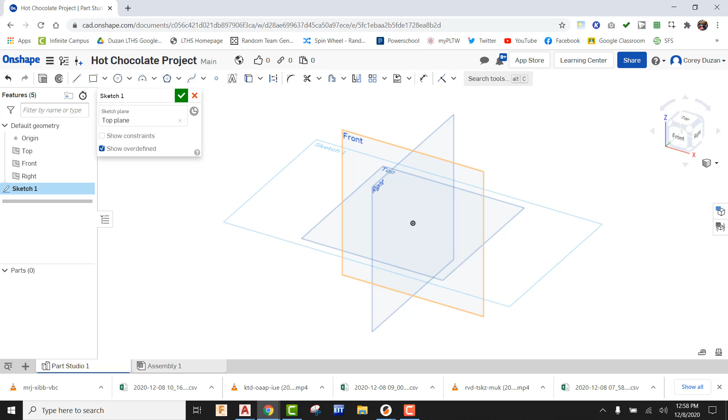Let's go ahead and create a new document, and I'm just going to be calling that one Hot Chocolate Project. I'm going to go ahead and create that public document. Once this gets up and running, let's begin by starting a sketch on our top plane. Let's look at that top plane on the view cube, and draw a circle starting from the origin, and we're going to give that a diameter of 4 inches. Let's go ahead and green check it.

Take a look at this in an isometric view, and now let's extrude that mug up a distance of 4 inches. That's probably about the size of a mug. So now we need to put the cavity in which the hot chocolate's actually going to be. We could draw a circle and extrude that, but let's just keep this simple and use some of those features we've already learned about this year.

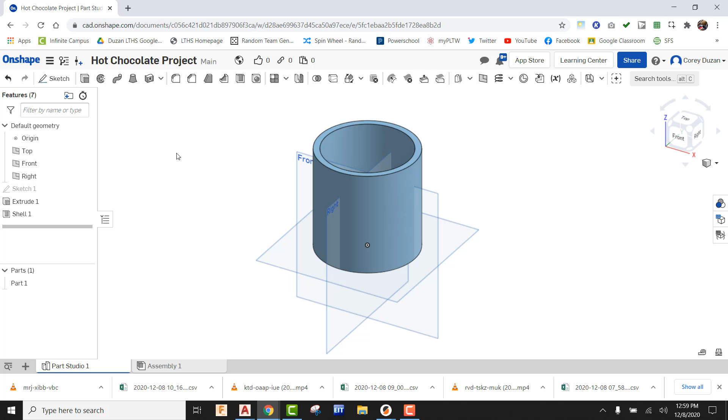That feature I'm looking for is going to be shell. I'm picking on the top face to remove it, and I'm going to say that the thickness of the wall on my mug is going to be 1/4 of an inch. I'll green check that. Now, it seems like those are pretty sharp corners for a mug. If you take a look at the ceramic on a mug, you can see it's rounded over just a little bit.

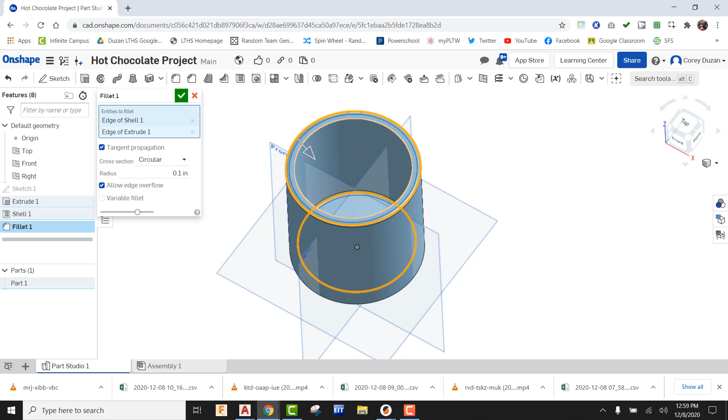So let's go to fillet, and let's just go with 0.1 for our fillet radius. Let's grab that inside corner, this top edge, and then flipping it over, we'll also grab that bottom edge as well. Green check it, and now we can see that everything is rounded over, just like a coffee mug. It's not going to be a mug without a handle.

So what I'm going to do on this one is offset a work plane, and the work plane I'm going to start from is this right plane right here. So I'm going to do an offset and pick on that right side plane. Let's see if I can grab that. There it is, I'm grabbing that plane.

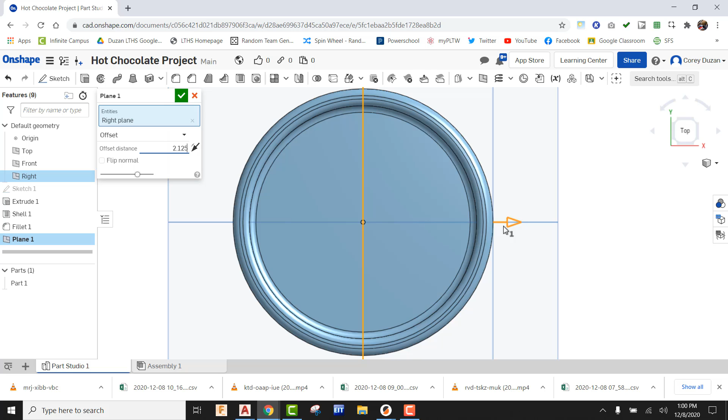We know that the diameter of the mug was 4 inches. So if I bring this out to 2 inches, we should see this come right to the edge. But I want to give my handle a place to start, so I'm going to bring this out to 2.125. I'll green check it, and now we can see that plane is just off the mug itself. So I'm going to start a 2D sketch on our plane. Take a look at this right side plane.

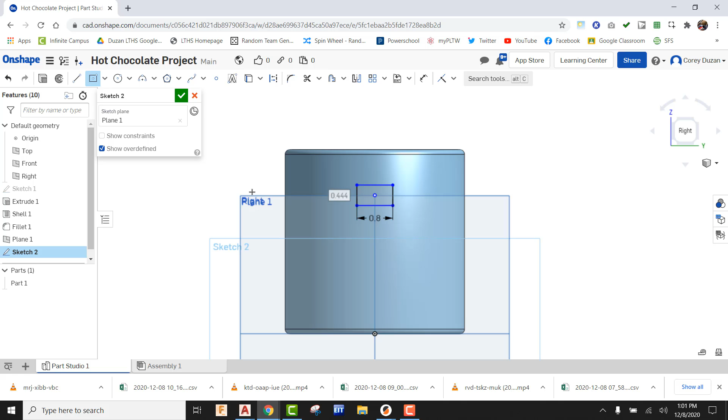I'm going to come up here and find our center point rectangle. I'm going to track this off the center and construct this rectangle. The overall width on this, let's just call it 0.8, and hit enter. The thickness on this, let's see what 0.25 looks like. That looks pretty good. Now I'm going to dimension this top to top edge; that looks about right, about 1/2 of an inch.

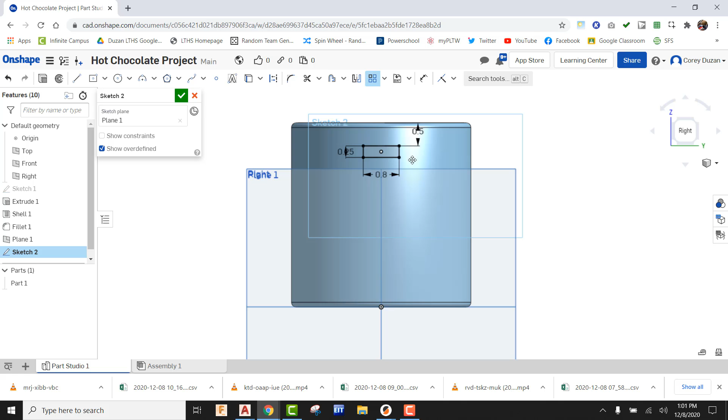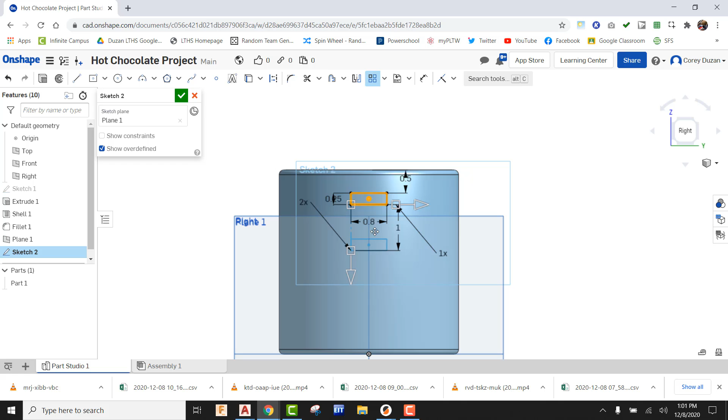I'm going to do the same thing down below, but with a linear pattern. I'm going to grab all this geometry. I don't want there to be 3 of those; I just want there to be 1. Then over here I want there to be 2 of these. Then I'm going to flip the direction and put in 3 inches. Let's see how far down it goes. Looks pretty good for mug handle placement.

Now what I'm going to do is round over the handle just a little bit. Coming up here, I'm going to find my fillet and add a fillet radius of, let's just call this 0.1.

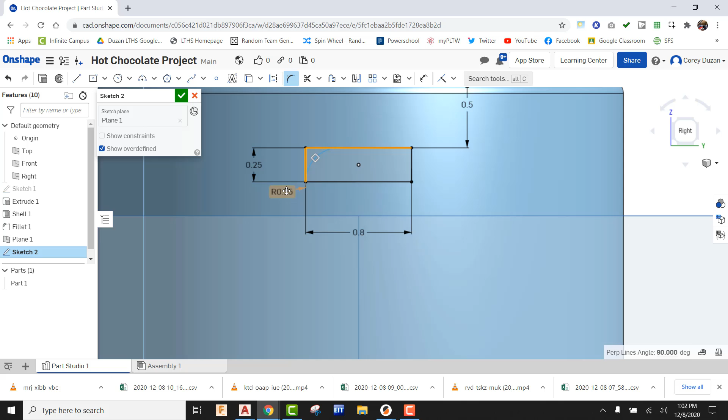Just to round it over just a little bit. And I'm going to go ahead and continue on with each one of these. Okay, that's going to be 0.1. I'll accept that. This will be 0.1. I'll accept that. And same thing here. Okay, so those are all looking pretty good.

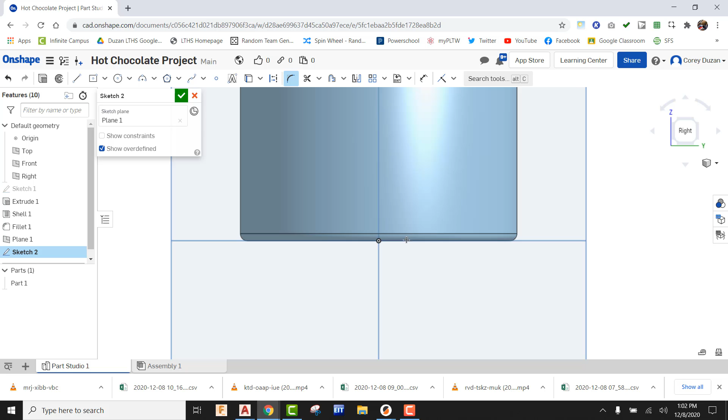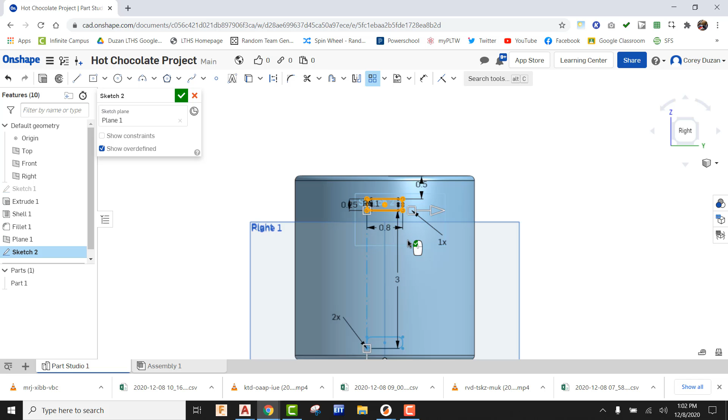And I'm going to go ahead. Oh, looks like I lost my linear pattern. No problem. Let's just grab him. And once again, we need to be going with just 1 of these. And we need to be coming up here and going with 2 of these. And then flipping the direction on it, and then our distance apart we said was 3, and we'll go ahead and hit enter, and let's just go ahead and accept that. Okay, so that's all looking pretty good.

I'm gonna go ahead and just green check it, go ahead and flip this over, and now what I'm gonna do is just extrude this profile and this profile. These need to be an add, and then here where it says blind, I'm going to be saying up to the face, but I need to do a flip on this to send it in the right direction. And that should, if I pick on the face, extrude to that face. So I'm going to go ahead and just green check that.

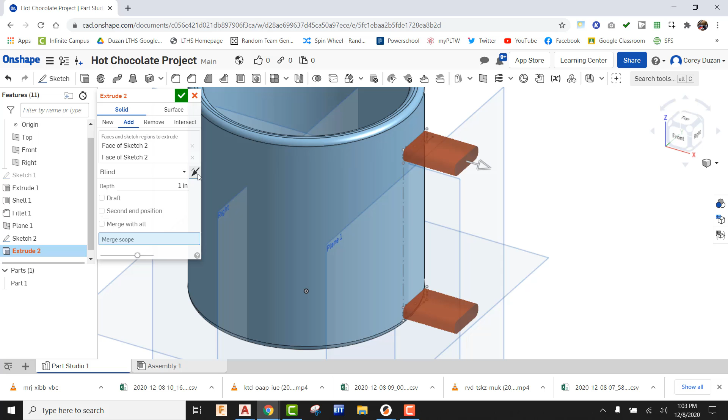Yeah, so that kind of failed. Let's try that again. Let's do an extrude. It's going to be this profile and this profile. They need to be an add. I need to do the flip, make sure it's going in the right direction. Instead of this being blind, I'm going to say up to face. And now I can pick on the face, and now we'll see there's two little platforms there that we can use to start our handle. Okay, so that is done.

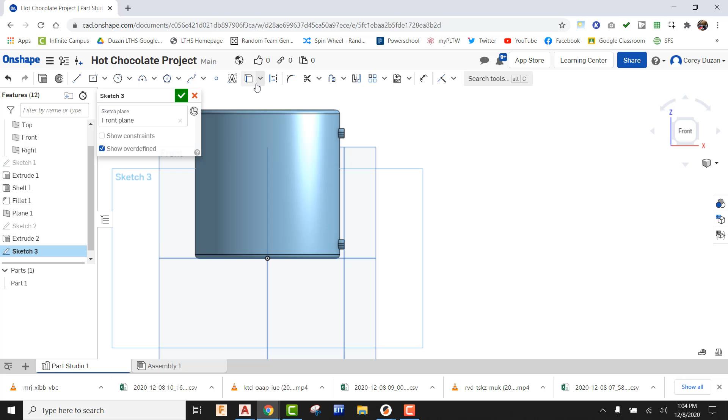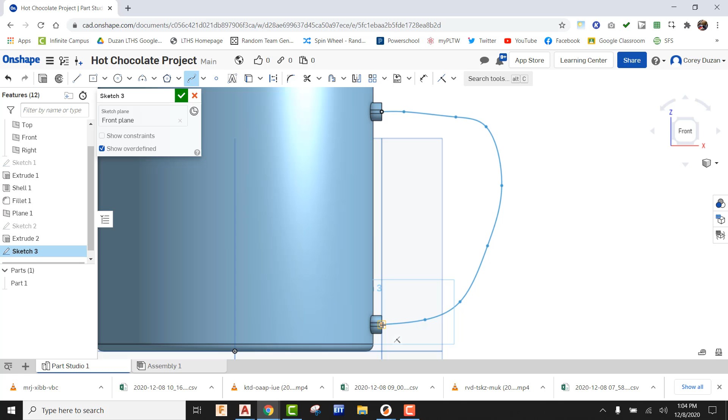All right, so now I'm going to sketch on this front plane, take a look at that front plane. I'm going to use this use feature, find that center point right there and this center point right here. Now I can use spline. I can start from this point and bring this handle out. Looking at my coffee mug, it's going to be a little bit higher here, and then we'll start rounding this over to bring this all the way down to this point. Remember, with spline, when you get to that last point, double click it to finish up the spline.

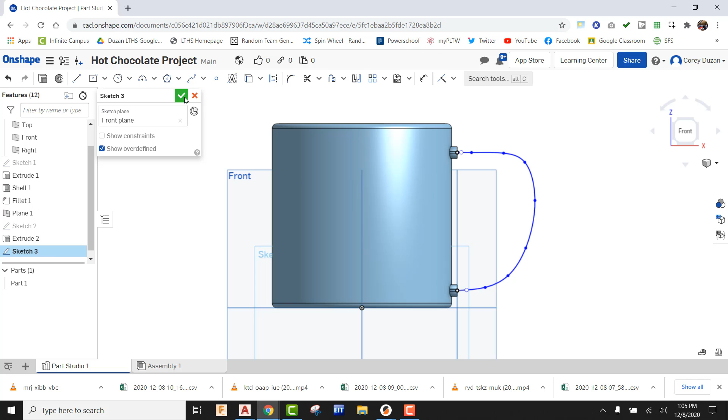Okay, so now that that is done, I can start managing what my spline is doing. I can go out there and get the profile I'm looking for. That's all looking pretty good, so I'm going to green check it. Now I'm going to start a sketch here on this face. I'm going to use to grab the inside of this profile and the inside of this profile, and green check it.

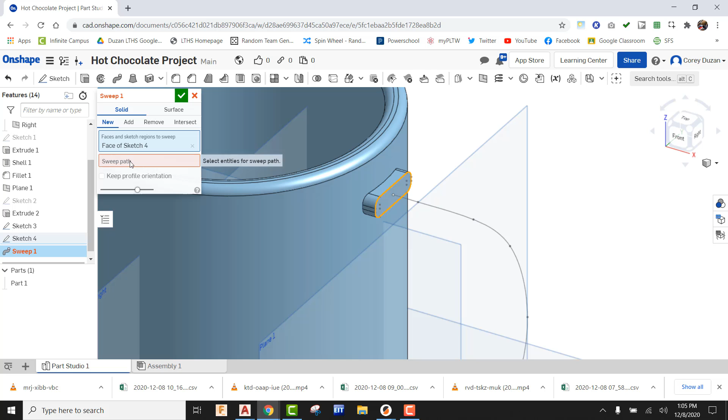And now I should be able to come up and use sweep. I'm going to sweep this as my profile, pick on the red sweep path, and grab that path. And it should be sweeping that handle all the way around, just like so. If we look at this a little bit closer, I think we're going to be seeing a little bit of a break in these two. Actually, on mine, I don't know if it did or not. I think we have a good overlap. Okay, I think we're okay.

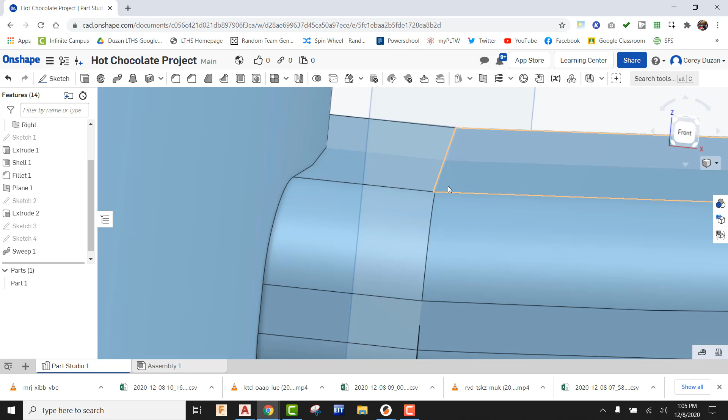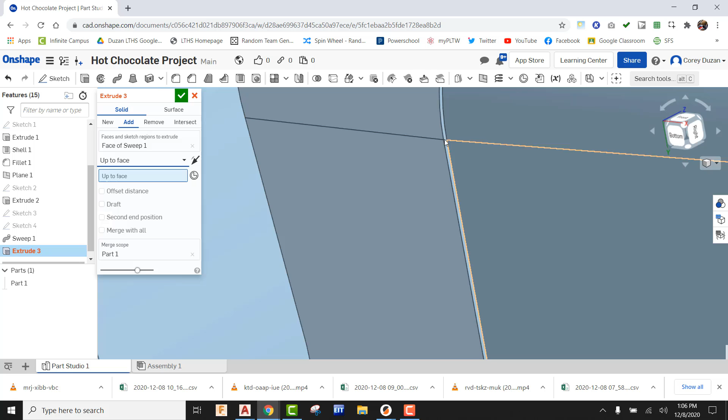Actually, it's right there. So let's do an extrude here of that profile. I want to do an add extrusion up to the face. I'm going to flip this over a little bit and see if I can grab onto that face. Okay, and we can see that just extruded to join those two. So now that is a whole part. So it looks like I have my handle created.

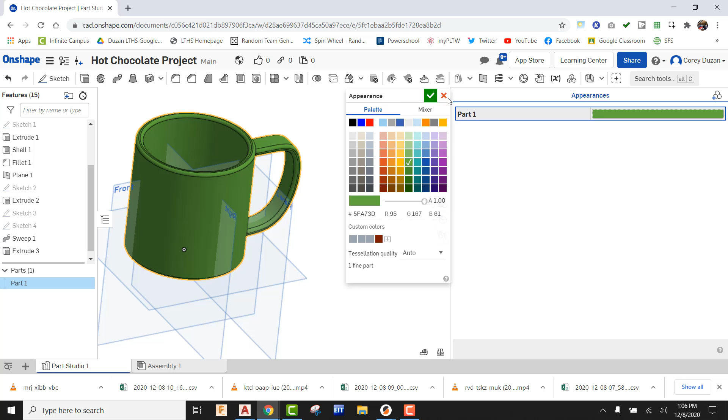Now is the time to make a color on this one. I'm going to come to my appearance and let's just make this a green colored cup, maybe a little bit lighter. Okay, that's looking pretty good. Get out of my appearance panel. All right, so we have started with our cocoa mug, our hot chocolate mug. Now I'm going to come down here and add a new part.

Okay, and I'm going to go ahead and just rename this. And I actually probably should rename the other one. So I'm going to say this is my actual hot chocolate liquid. And then back here, this one is my hot chocolate mug. Okay, so we have that.

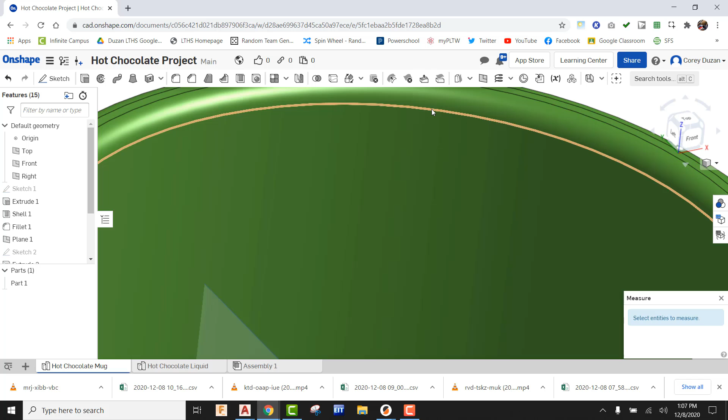All right, so before I kind of get going here, I need to get some information. So I do need to come out here and use measure. I'm going to come right here to this ring and see what that diameter is. So it's 3.5. All right, so I'm going to come here to my hot chocolate liquid. I'm going to look at this from the front view. I'm going to come out here and sketch on that front view. I'm going to go ahead and just draw a line. And this is going to be over 3.5 divided by 2, which means that is a distance of 1.75.

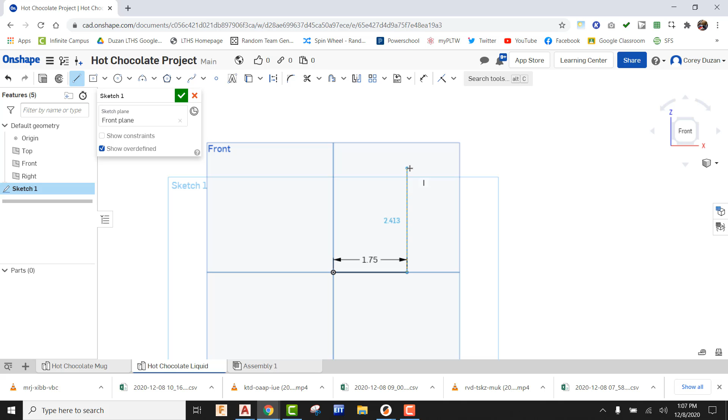Now what I'm going to do is go ahead and just give myself some depth to this. So I'm going to say that this is going to be, I don't know, let's just go with 3.25 right now. And then I'm going to draw a line up from the other side. And that is also going to be going up that 3.25. I can track that in place if I want. And now we can go ahead and create the profile for what we're going to use to revolve.

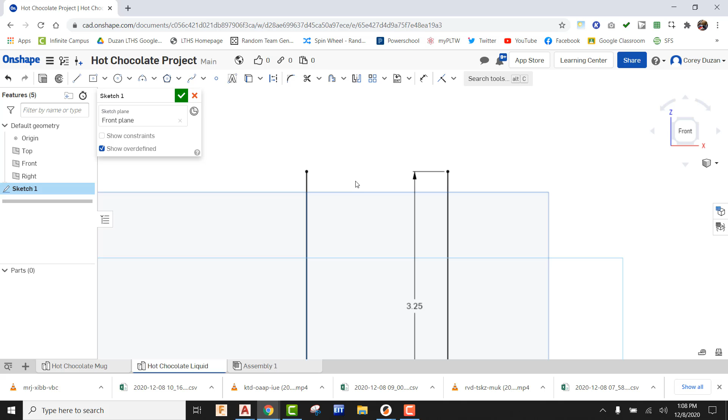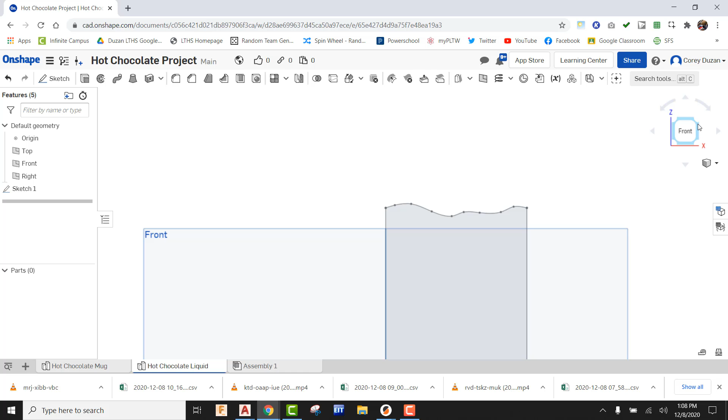And so since the top of this is actually liquid, I'm going to start here from this point, and I'm going to go ahead and just sort of give myself some wavy sort of texture here for the top. Okay, just like so. I'm going to double click this to end that spline, green check it, and now I'm going to come here to my view cube, go into an isometric view. Now we can go ahead and use revolve. That's my profile, my revolve axis box. I can pick on this line. It's going to be revolving that all the way around.

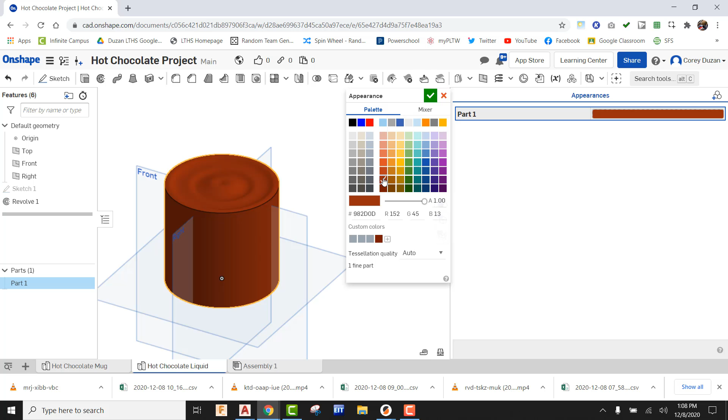And since this is hot chocolate, we need to come over here to our appearance panel, double click on this, and we need to be picking a good color for hot chocolate. So that looks like a pretty good hot chocolate color. I'm going to green check it, get rid of my appearance panel. Okay, and now my hot chocolate liquid is ready to go.

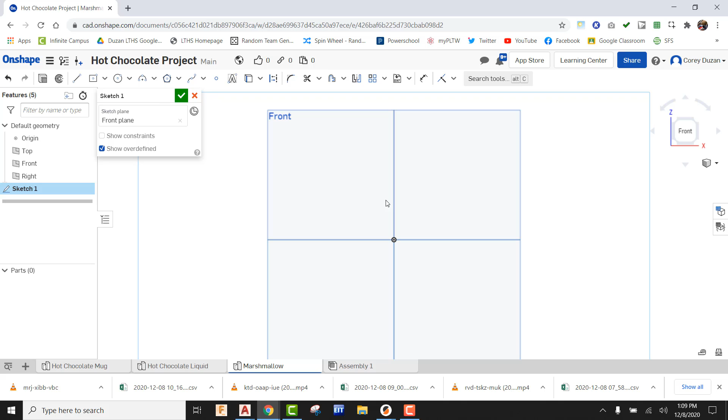All right, it definitely wouldn't be hot chocolate without marshmallows. So I'm going to add a new part, and I'm going to name this marshmallow. Okay, so I'm going to sketch on my front plane. Take a look at that front plane on the view cube. I'm going to draw a circle starting from the origin, and I'm going to say that that is 0.35 maybe for my diameter, and now I'm going to extrude that to a distance of 0.5. So let's just drop that in, green check it.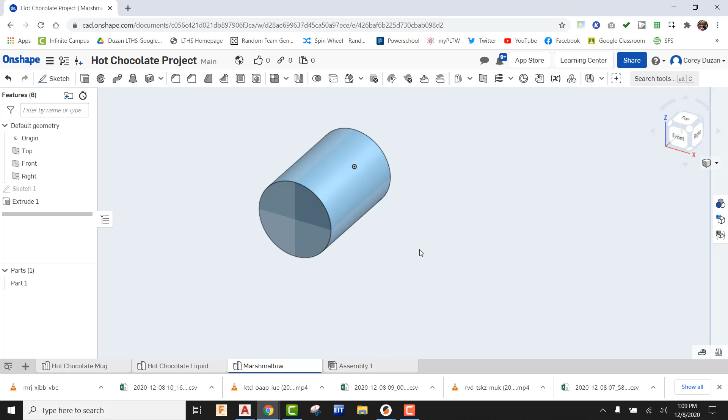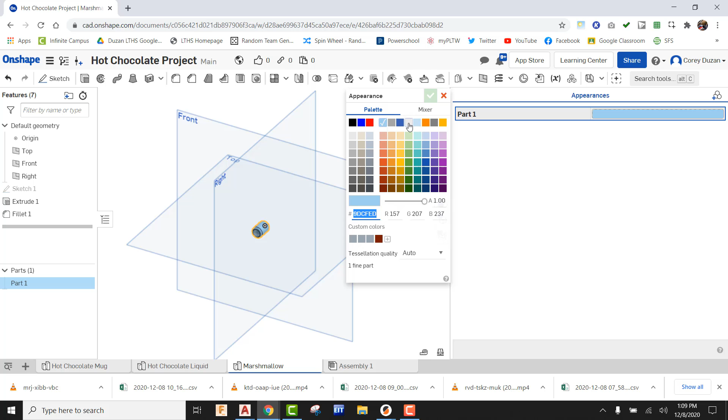Looks like about the right size for a miniature marshmallow, but way too sharp a corner. So let's use fillet here. I'm going to grab this edge and grab this edge, bring this down maybe to like 0.05 for my radius. Let's just see what that looks like. Nice and rounded over. So let's green check it. And now let's come over here to my appearance, double click here on this box, and let's just turn that to white, and we green check it, and we have marshmallows to use. Okay, so we basically have everything that we're going to need.

Let's go back into the assembly. And now let's start inserting the parts that we're going to need. So we know we're going to need the hot chocolate mug. Let's drop that in, green check it, and let's right click on it to do a fix. And now that is fixed in location, so we're good to go. I'm now going to come in and do an insert again. This time it's going to be the hot chocolate liquid.

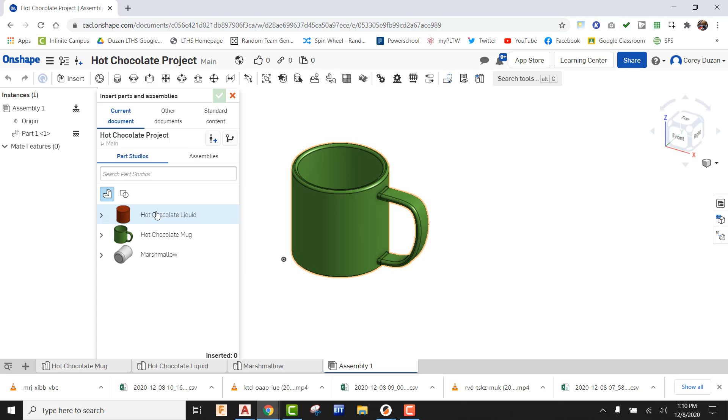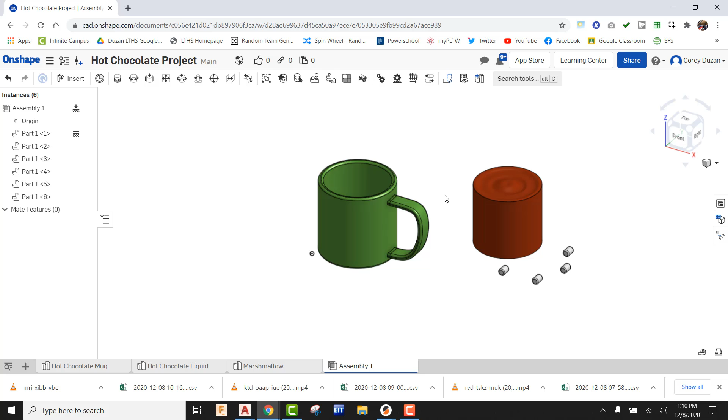And now I'm going to come here to my marshmallow, and I'm going to drop in, I don't know, 3, 4 of those things. Because we're going to have some fun using offset with the marshmallows to orient these where they look a little bit more natural. Okay, so the liquid needs to go into the mug. So let's just flip this over. Let's take a look at it. And we're going to come up here and find our fasten mate.

So I'm going to flip to the bottom, and I'm going to find the origin here at the bottom of the actual liquid. And now I'm going to be looking inside the cup and finding the origin right there at the bottom of the mug. We're going to go ahead and green check it. It's in the right orientation. All right, so we have the liquid actually in the cup.

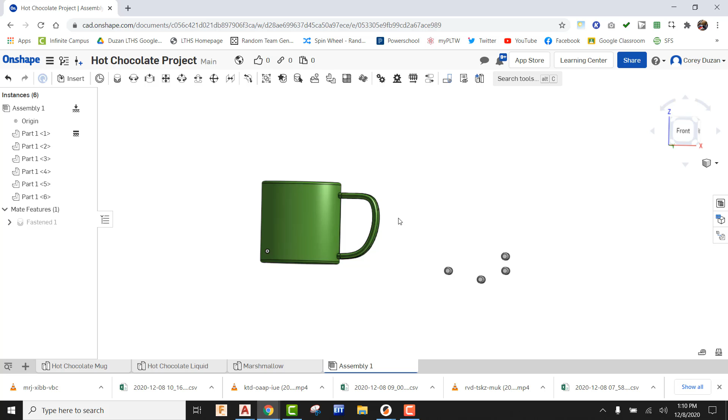All right, and now we can go ahead and start in on the marshmallows. So this is going to be a little bit more interesting. So check out how this works. So we're going to do a fasten mate. I'm going to come here and find the origin here at the bottom of the marshmallow. And then I'm going to flip this over and pick on the origin that's the bottom of the actual mug.

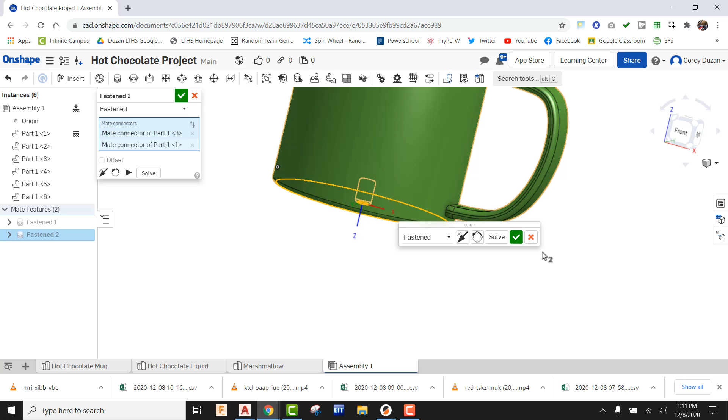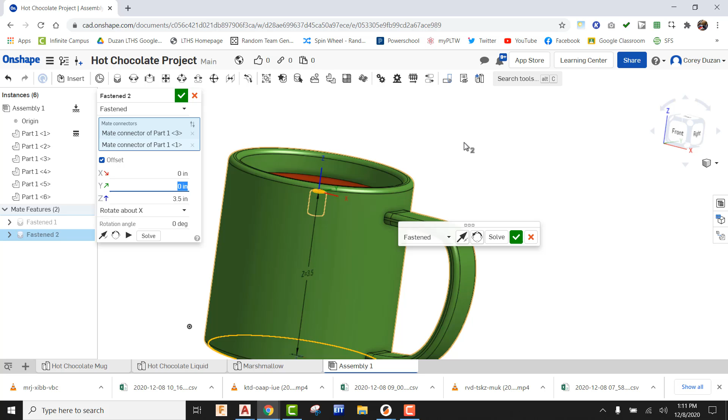All right, so right now we can see that this is going in the wrong orientation. We want that positive Z to go in the other direction, so we're going to go ahead and do the flip. Okay, and now we can tell it how far up we want this to go. So if I pick on the offset, I can come here to my Z and I can say, hey, I want that to come up 3.5 inches, and let's just see where that's at. So it's not quite up there on top of the liquid yet, so let's go to 3.75. Okay, let's just kind of get that up there.

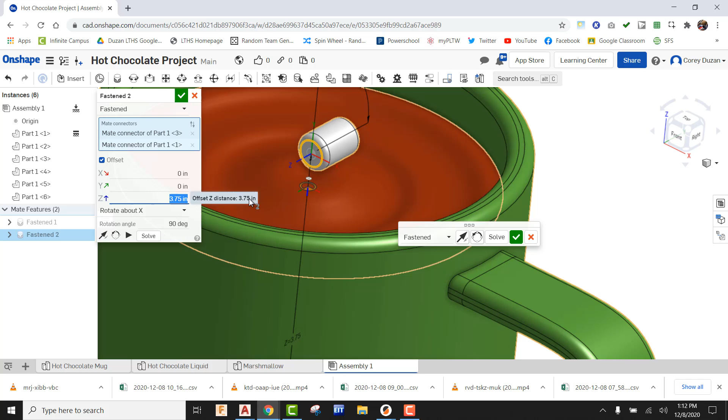All right, so now what we can do is we can start rotating. I'm going to say I want to rotate this along this x-axis that we see right here. So right now we can see it's rotating along the x. And what I can do is just come out here and put in an angle. So I'm going to just lay this down flat. So I'm going to say that that is 90 degrees. Okay, so we can see that is flat, but now it is hovering above the liquid. So we might have to come back in here and change this up, maybe back down to 3.5. So we can see it is partially submerged into that hot cocoa.

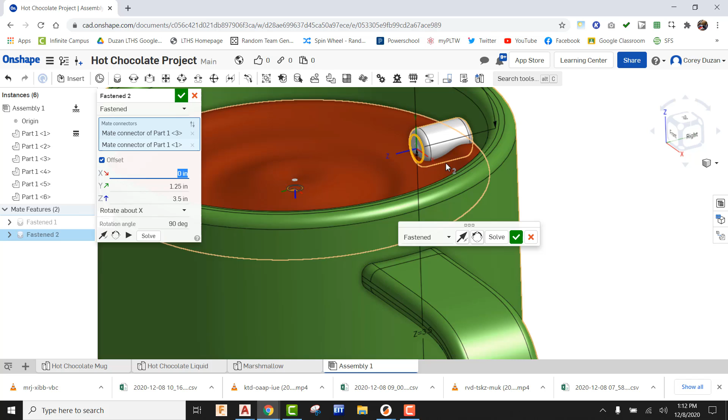And now we can come out and start playing around with how far off we want this to be. So maybe we want to send that over like 1.25 inches. Okay, that's going to be over there. I don't think it's actually running into the wall, but let's just go ahead and bring it back just a little bit. So we'll just say 1.1. That's going to bring it back over. Okay, and now we can go ahead and green check it. All right, so that marshmallow has been placed, and it's floating there on top of the liquid.

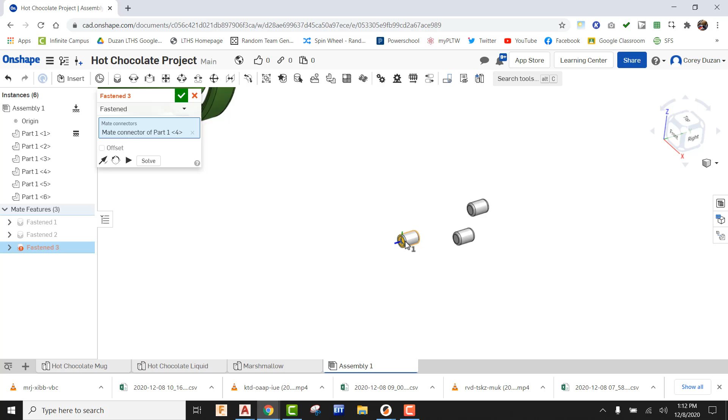All right, let's just do a couple more of these. Let's go to fasten mate. I'm going to come back into this one again, find the origin, flip this around, look at the bottom, find the origin of the mug. Remember, we're looking at that positive Z. We can see that is going in the wrong direction. So let's go ahead and do the flip. Now our positive Z is going up. I'm going to come into my offset, go into my Z, and send this up, I don't know, 3.5. Okay, it's going to bring that up there to the top.

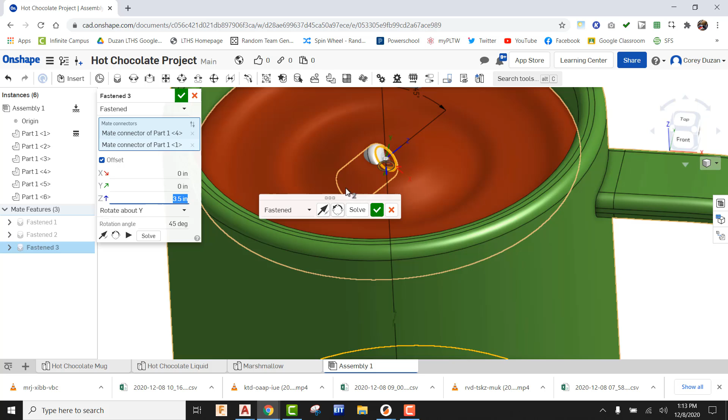And then I'm going to go ahead and rotate this along the Y. So I'm going to rotate this along the Y, and I'm going to say that I want this to be, I don't know, let's just say 45 degrees. So it's actually going to send it out just a little bit. Okay, I'm going to bring this up just a little bit more, maybe to 3.6. Okay, it's going to bring that up. Let's just go with 3.7. Let's just see what happens. Okay.

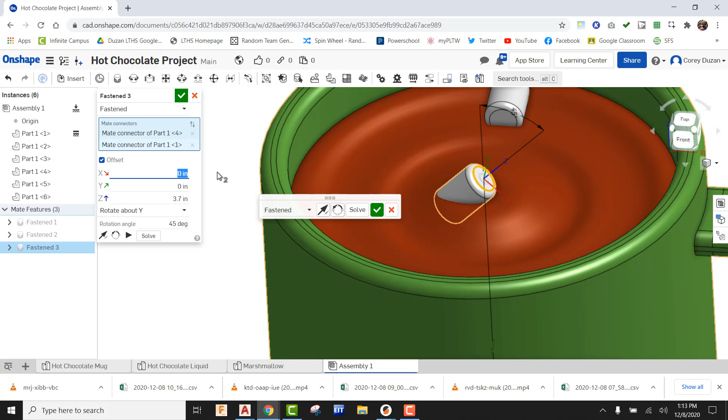And the last thing I can do is go ahead and shoot this off into another direction. So I don't know, let's just send this out, maybe an inch. Let's just see where that sends it. Okay, we can see how it's just partially submerged there, maybe a little bit high still. Let's just drop it down 3.6. Okay, looking pretty good. We'll go ahead and green check that. All right, so you have the ability to sort of tinker with your offset distances and getting that marshmallow kind of where you want it.

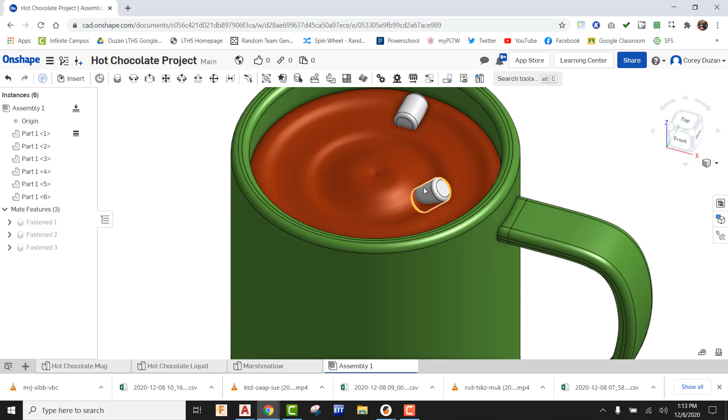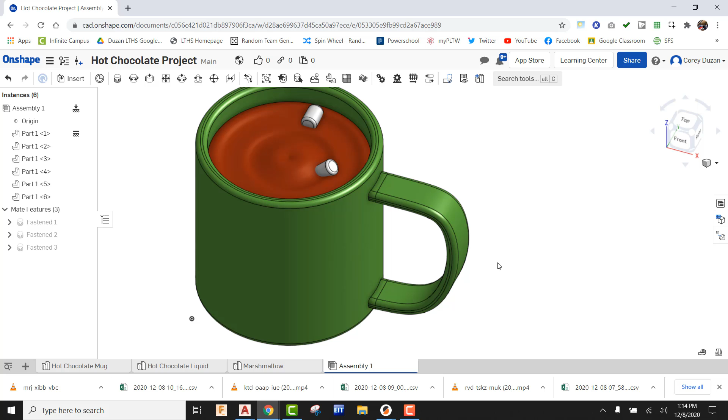But anyway, that's sort of the pattern or the procedure you would use in order to put the other two marshmallows in. Just sprinkle those across the top. All right, so everything's looking pretty good. I think it's just kind of a dull looking cup right now. So what we can do is go out there and actually add something to it. So maybe some sort of raised piece of text or lettering or whatever. So what I'm going to do is actually come back here to the hot chocolate mug.

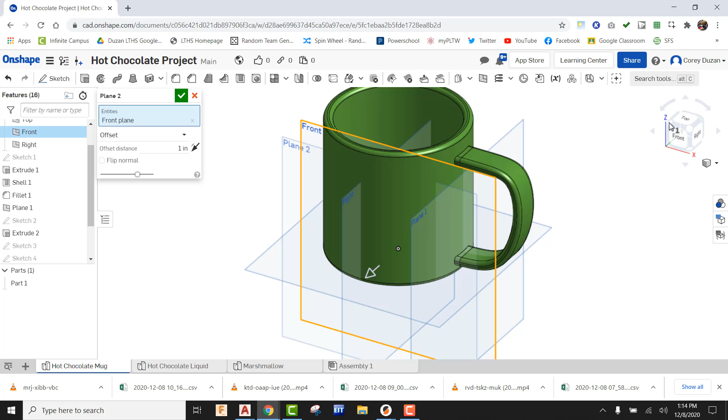And just put this into an isometric view. Okay, so what I'm going to do is actually offset this front plane. And I'm going to do something kind of similar to what I was doing earlier with the handle. So I'm going to offset this front plane that we see right here. If we look at this from the top, that was a radius of 2, diameter of 4. So if I did a distance of 2, it's going to send that right to the edge, but I'm going to send this a little bit more. I'm going to say 2.125. Okay, so it's just going to be raised just a little bit outside of the mug. I'm going to go ahead and accept that.

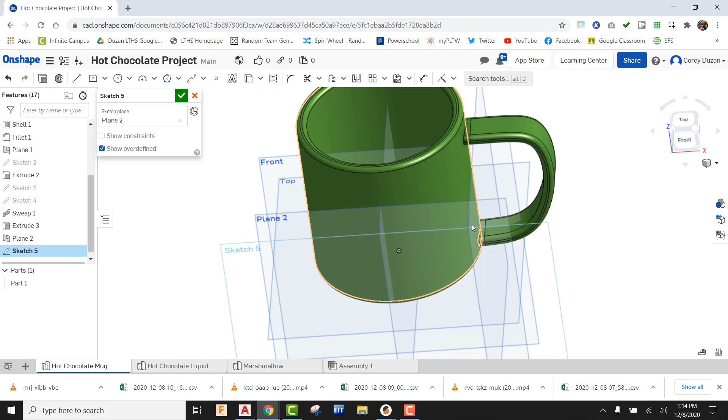And now I can go ahead and start on my 2D sketch right there at that plane. Take a look at it. And now we can go ahead and create our text box. So I'm going to go ahead and just type in LTHS and green check it. All right, that text is absolutely huge, goes beyond the actual cup. So all I can do on this is just come out here and dimension this. And I'm going to say I want my text type maybe to be like 1 inch.

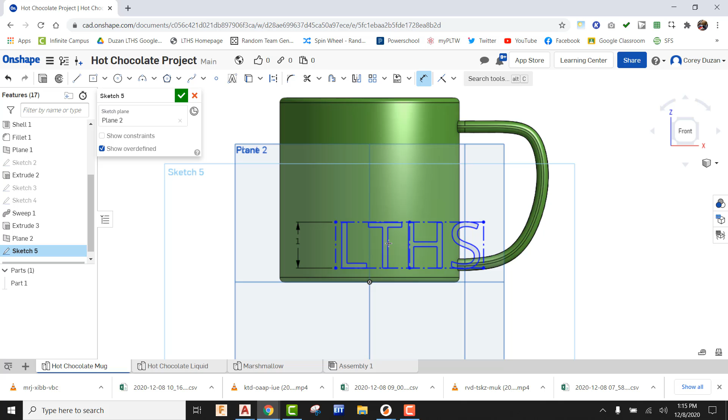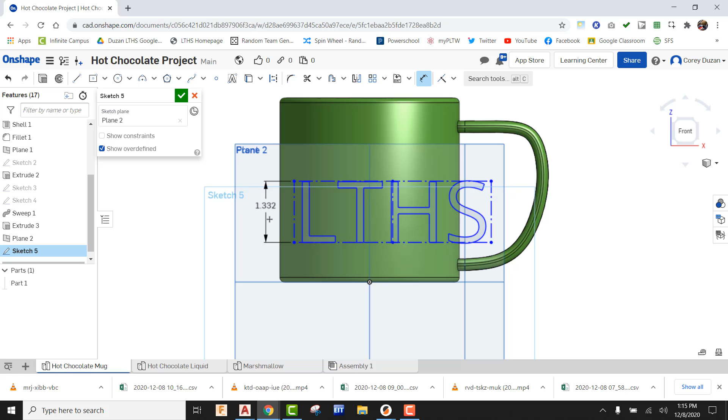Now what I can do is I can grab a hold of this guy. Let's see if we can sort of push this into the right location. It's not wanting to behave. It seems like it is constrained. Let's try this again. Let's go with this and LTHS, green check it. Let's put our dimension in, make sure that is 1 inch. And now let's see if we can't grab a hold of this. It's still locked on.

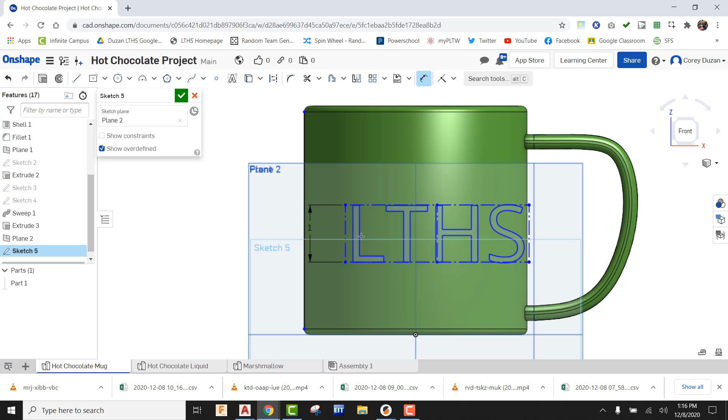Okay, let's see if we can't dimension this into place. So from here to, let's see if we can't get this to work for us. So from here to here, can we get that to bump over? Yeah, we got it. All right, so it might not be perfectly centered, but I think it's going to work just for this sort of demo. Let's just go with 0.45. That looks pretty centered. I like it. And now let's see if we can't just drag that up just a little bit. Okay, get that centered. I'm sorry, I got to get this centered a little bit better. Okay, that's looking pretty good. Okay, so I'm going to go ahead and green check that.

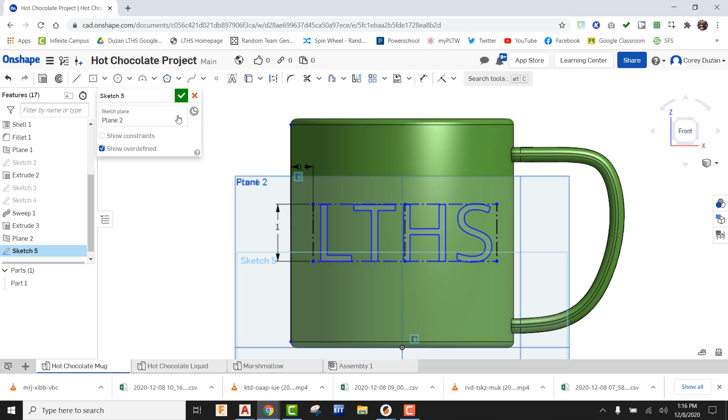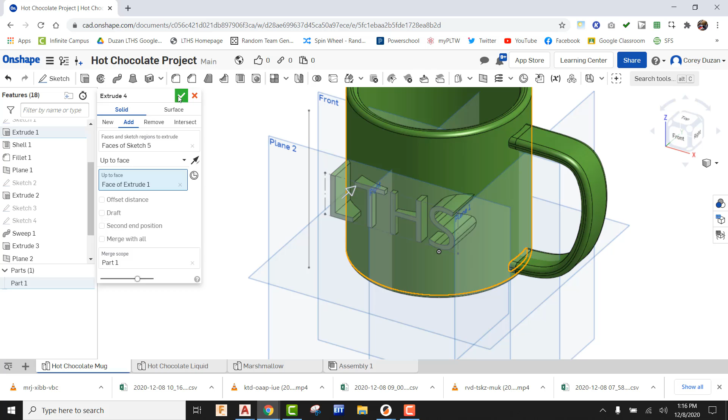Now what I'm going to do is use an extrude here. And let's extrude this text. It needs to be an add. I'm going to flip it in the right direction. Okay, and now what I'm going to do is, instead of this being blind, I'm going to say up to face. I'm going to pick on face and then pick on the actual face of the mug and green check it. All right, so that's not the way we want our extrusion to look. We actually want this to be rounded over to go along with the face.

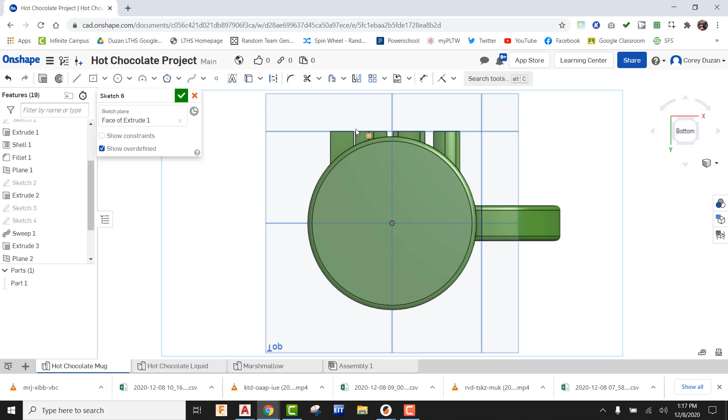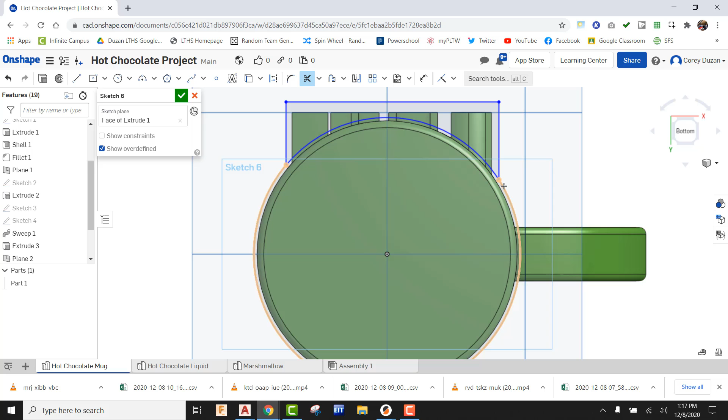So what I'm going to do is I'm just going to create a sketch here on top, come to this flat part. Let's go with this side. Okay, and now what I'm going to do is just draw a circle starting from the origin. I'm just going to bring this out just past the actual mug. And then I'm going to go ahead and just draw a line starting from this arc, send this straight up, keep it outside of the text. Okay, and then bring it back to the circle. Now I can go ahead and use trim, get the profile I'm looking for. That is the profile I'm looking for, so I'm going to green check it, send this into an isometric view, and watch how we do this.

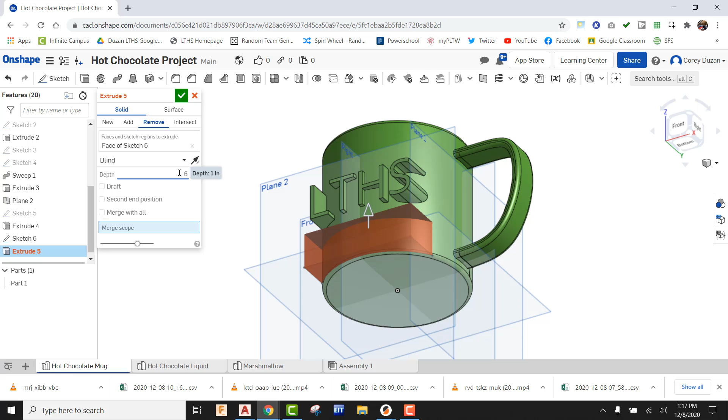We're going to say extrude this profile. It needs to be a remove. Okay, it's going in the right direction. And I'm going to say, send that up like 6 inches or something. Okay, like so. Okay, and we should be able to bulldoze all that off the top of it. There, we got it. Now let's go ahead and green check it. All right, and there you go. So we have our raised text and it is rounded to the curvature of the actual mug.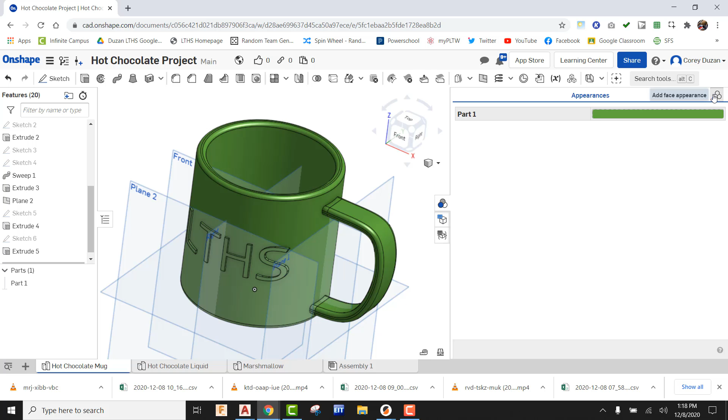And in order to finish all this up, we want a little bit of contrast between those two. So I'm going to come out here and add some green, okay, with our holiday colors, to that face, that face, that face, and that face. Green check it. All right, and we have ourselves our holiday mug. So let's go ahead and get rid of the appearance panel. Let's go back into the assembly. Okay, we have marshmallows floating in our hot chocolate in our customized mug. All right, and that is it. That is our Onshape Wednesday for today. That's hot chocolate, everybody's favorite holiday drink, in a mug.